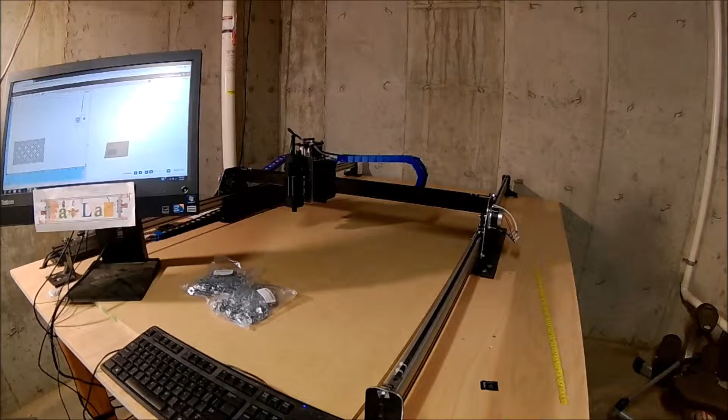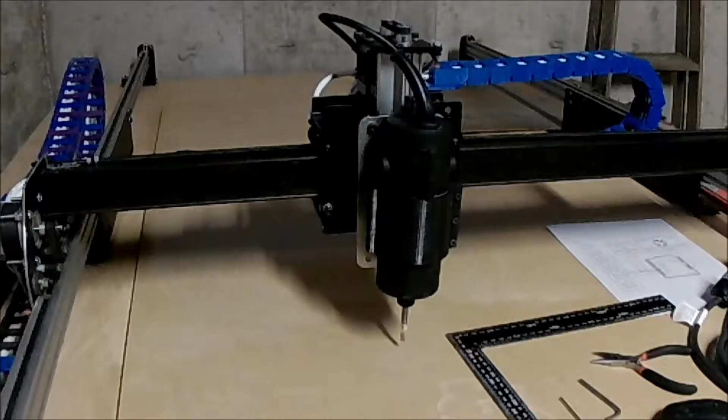I've been playing with this a little bit and got a few things cut. I actually cut into my board a little bit when I was doing my testing. I did an STL of a St. Louis Cardinals logo to start. It did okay, kept a very clean crisp cut as it went across, and I drove right into my board here a little bit.

But this is just my waste board, so it's all okay, sort of. I was going to use this waste board as a flip over, so I don't think it will affect that. I can drill all my holes in here, put my nuts in, and then flip it over and surface it. So I think we're all okay with that.

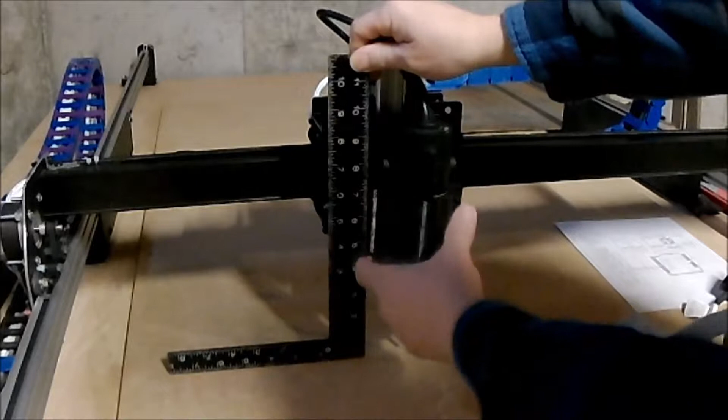This won't affect too much. But when I was doing it, I noticed that this router is not what we'll call square at all. Maybe from this side it'd be easier to see on the camera. I've zoomed in, my zoom is not great, let me see if you guys can see that. Probably you can see the light as I pass through there. Down here we have touching, but up here we have an 1/8 inch gap, just in that short span. So that's a big difference.

Basically it's like tilted to the side really bad, this way. I also checked this way, and this part is back about an 1/8 inch from the top, from just there to there.

So I have no play, and I really don't think that this is what I need to be moving in and out, because then I have to take the whole frame and adjust it. And if I look at the frame, although it's a very short span, it's not really off that much. It is off a hair from the table. But the table could vary from front to back as well.

So the question is, is this square to these? And I think it is. So I think my table might be off, and when I surface my table, that's pretty square. When I look at it, can you see it far over? No. So I'm squaring off of this bar here to this bar here, and when I do that, it's really square to the bar. So I don't want to change this bar to this bar.

But what I need to be able to change is how this and this attach to each other. So I think what I'm going to do is try and square this face up with this face, and that all comes into play with these 4 wheel mounts here.

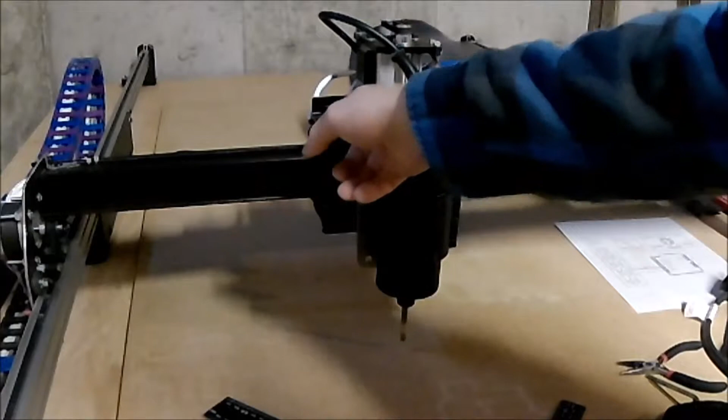I honestly believe if I add another couple washers down here in the bottom half of this, because they're so close together, if I add one more washer here, it will actually pull this out enough to make that an 1/8 inch. So that's what I'm going to start with, adding one additional washer to the bottom.

And I noticed that my Acme threaded rod is closer at the bottom than it is at the top, so that extra washer will actually kick that out as well, which is good, because I was rubbing a little bit up here at the top, and I think that's because I have it pushed back in the bottom more. So I'm going to go ahead and add that extra washer and try to adjust that way.

That's a one-time change. But up here in the front, I need to be able to adjust this in this fashion, so I can do this and lock it in.

And I 3D printed this piece, and I think it printed cocked to the side a little bit, so I'm going to re-3D print it on another printer. I have two printers, one might be off a little bit as it climbs up the Z-axis, the other one's pretty accurate. I already tested it.

Look at you, you're curious aren't you? So let's let her get out of the way. Come on, let's go. I can't see this if you're in the way.

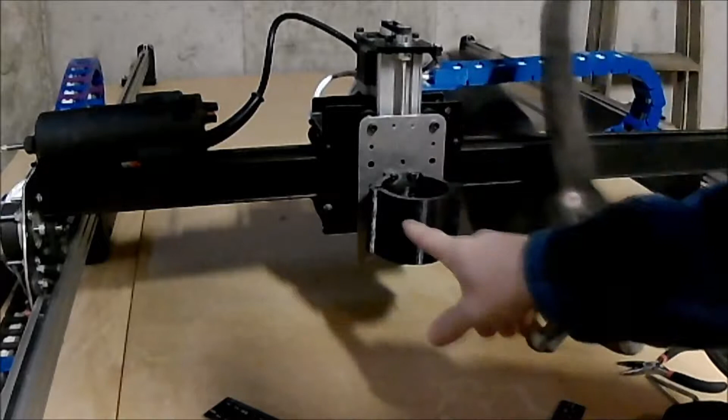There you go. I'm going to 3D print this again, and this time I'm going to print it with 3 holes in the front, so that when I pull the router out, which I can, but I had to undo some bolts to pull it out on the side here, loosening these up. But then I still can't get to these bolts inside here, so I'm going to leave 3 holes in the front so I can get my Allen key all the way in here and adjust this.

And in the back here, there are 6 holes holding this on. I'm going to actually print those holes as slots instead of perfect holes, because right now they're the exact size hole of the 5mm bolts. So I'm going to print them as 5mm top to bottom, and left to right I'll make them 10mm, so they're an oval, so that I can give this a little bit of a twist until I get it where this right here is square with the board.

And it's not right now, so that's what I'm working on right now. I'm going to 3D print that, take this off. I'm going to pull this metal piece off in the background here and add some more washers.

Just to get it all trammed up true. It won't be 100%, that's when you go in and resurface your board. But the key is that the bit is not running at an angle like this, because if it is, you can't ever surface it right. You'll always get a point on one edge of your bit - this is an exaggeration of how big a bit is - but if this corner of the bit's down and this one's up, you'll never get a surface that's smooth. So we need to get the bottom of the bit flat.

That's what we're working on right now. And I need to be able to make this adjustable, that way if it's not perfect, I can adjust it. I don't know how I can make this front to back adjustable unless I put some kind of... I don't know. I'm going to leave it at just working on this and trying to get this just right before I lock it down.

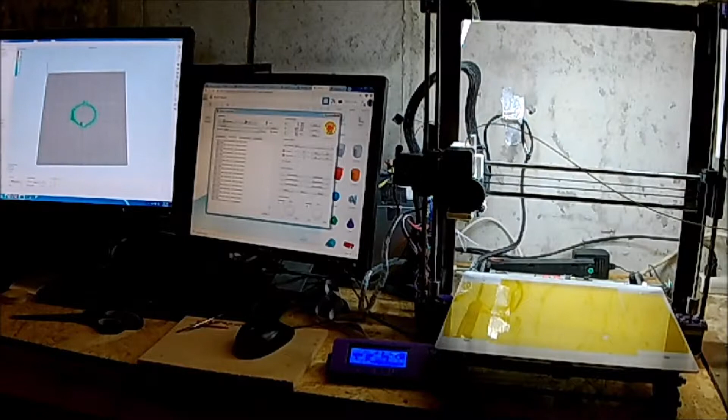So I'm going to go ahead and run my 3D print here. Looks like I'm up to temperature now. I'll go ahead and send this over. It should get started, do a homing thing, and then print this piece.

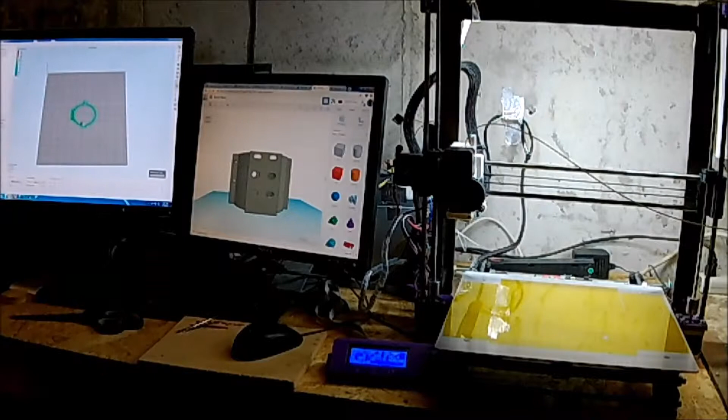Let me show you that piece. So on this screen you can see the piece - I think you can see that. Let me come back and look. Yeah, I'll come in just a little bit.

Not sure why that print didn't go, it's still flying in and out I guess. But I'll try and move around a bit and show you. So this - oops, that's not what I wanted to do - but if I move like this, you can see this is that piece on the thing.

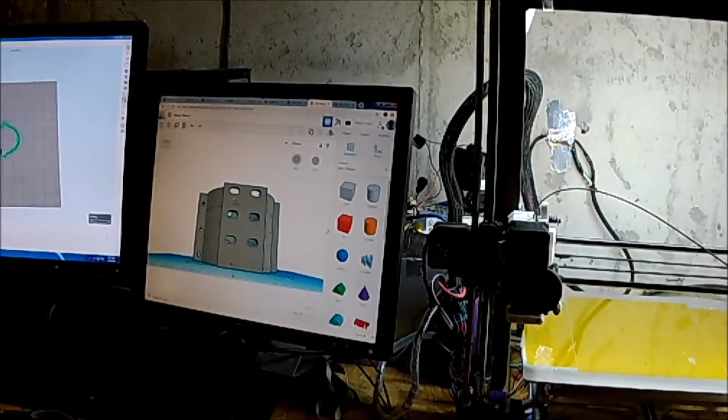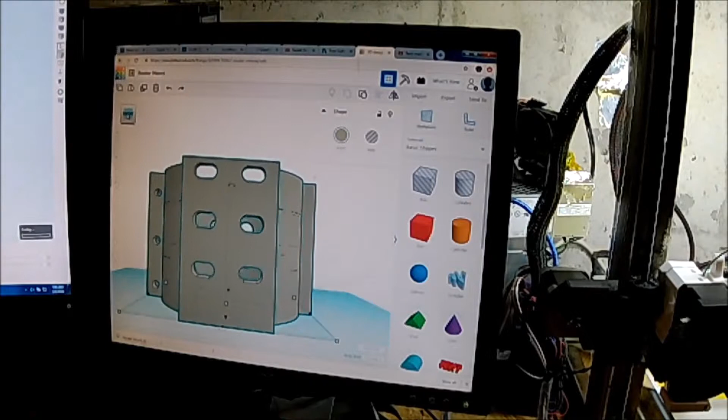I added these holes - 6 holes - right here. And on these holes in the back, I made them oval, as I mentioned, to try and help with... there we go, the back holes are now oval. Yeah, now you can see it kind of. And the front holes are there, so I can drive my screwdriver through the front of it, whereas before I had no front holes.

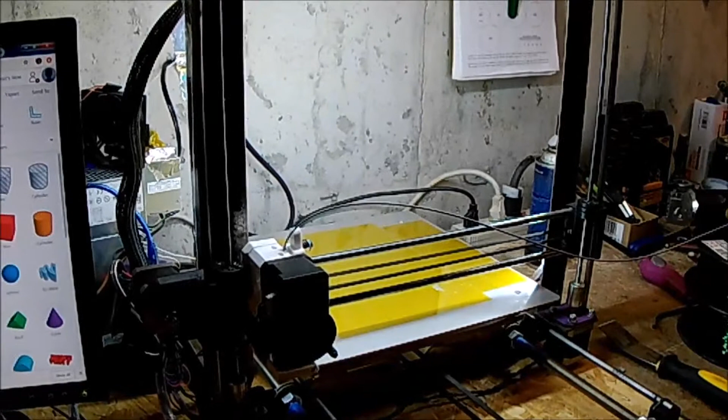So, redoing this right now. There we go, it's running a homing cycle right now, and then it should go over and start printing.

So sometimes I print with tape and sometimes I print without tape. If I want it to stick real good, I use tape, and if I'm not as concerned about it, I don't use tape. And it looks like, there it goes. So it holds really good to this Teflon or PEI something, if it gets a good grip at the starting point. That's why I've got to watch that first layer always, to see if it gets that good grip, because once it gets a good grip on the starting point, it does really good.